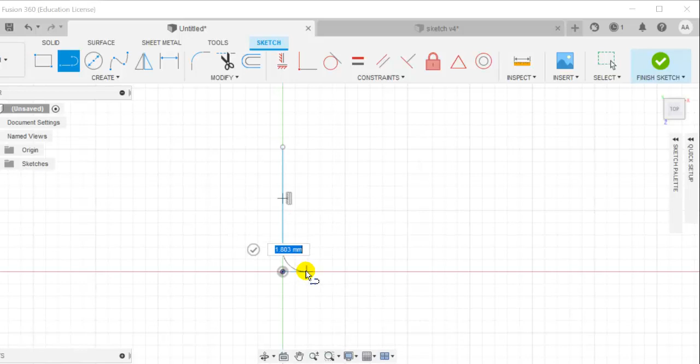We're going to quickly do this and put the dimensions later on. So I'm going to go to Fusion without dimensions, just kind of play around with it and continue to see where it takes me. I'm not going to put any dimensions yet, just make sure it looks very similar.

So you can see this line over here. When I finish this line, it's not horizontal. We can use constraints to make this horizontal, and we have certain constraints available, so we can probably make this perpendicular to this one, and then I have a horizontal line.

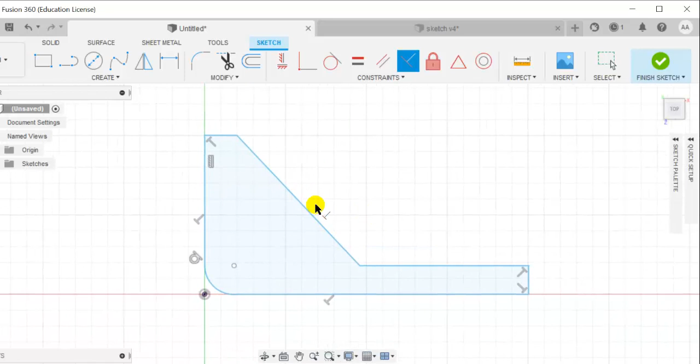I'm going to start putting my constraints, which are basically dimensions. What I see is that this is 6, this is 10, so this shouldn't take long. I'm just going to put, it's going to be 6, and basically this is 10.

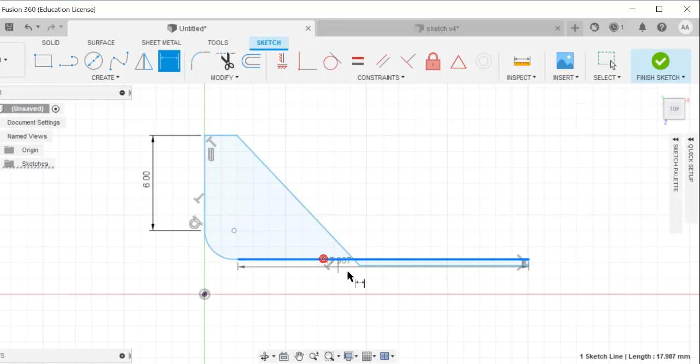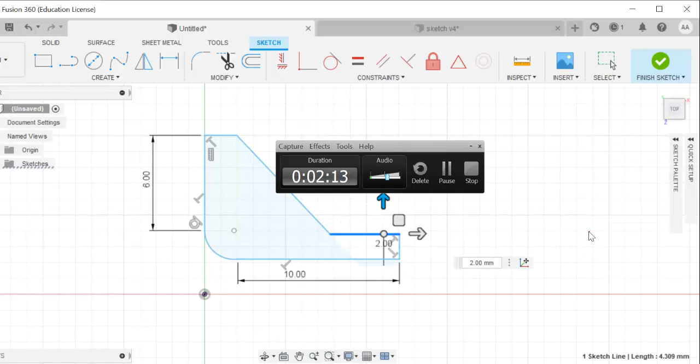And this line over here, so we have 10. Now just move this line over here. We can move it just a little bit so it looks a little better. Okay, and what else do we have?

We have that this is 5, so this one is 5. Make sure that this is 5. And then by construction we can get these.

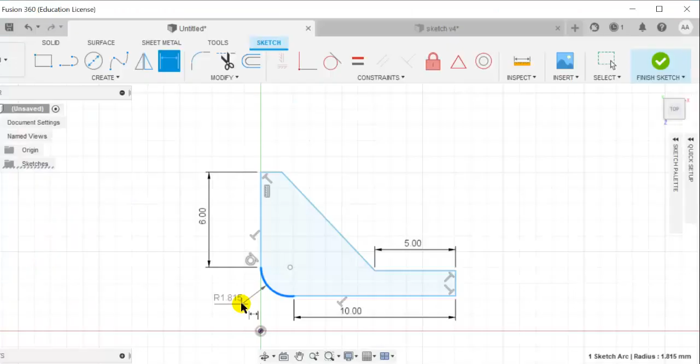So this is going to be R1. I see that this R1 is 1, just 1 millimeter. As you can see, some of the things are not quite okay yet, just because this is supposed to be 10, and this is going to be, as you can see, this bump.

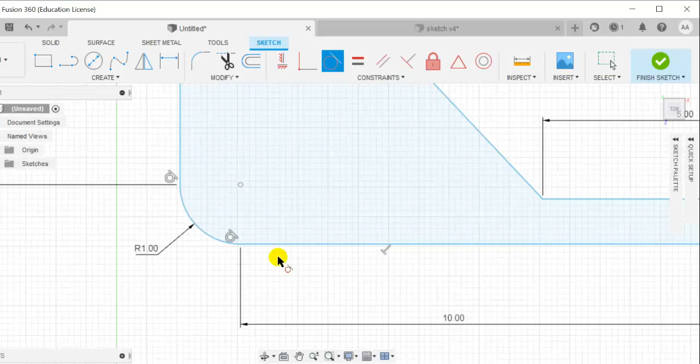So let's try to make it tangent. This has to be tangent to this one, and we'll see what we can do. Now this one is also 1, so we know that this is 1.

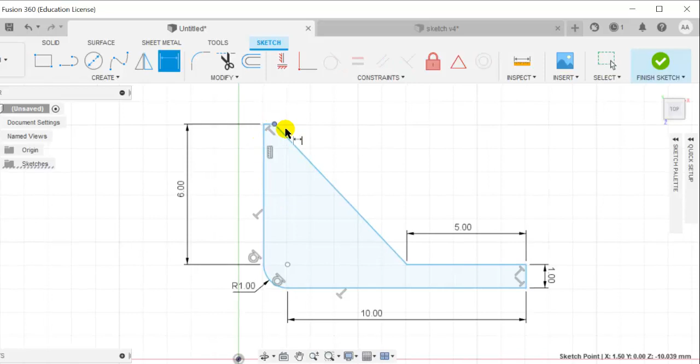There we go. And then by construction this one should already be done. Then this one is also 1. I'm going to make sure that this is 1 also, and just click here, and this should be 1.

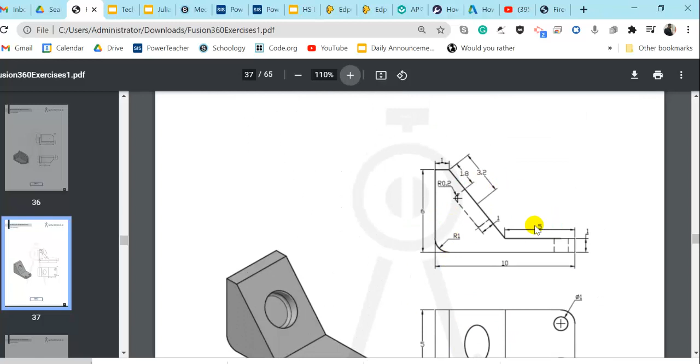So there we go. So we have our construction, and it looks like the radius, the center of this, is 3.2. We're going to do that in a minute and I'll show you how to do that hole, but we can have the rest of the constructions well made. These holes are going to be done later on.

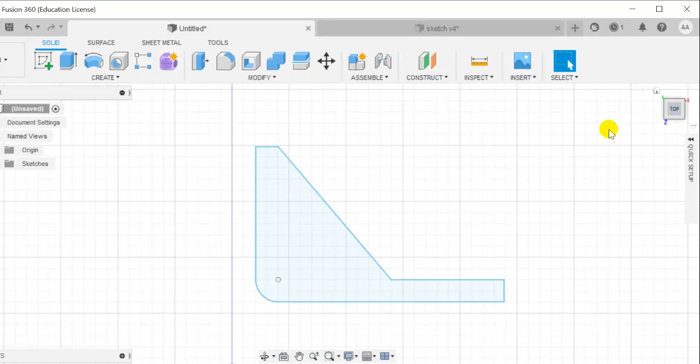So the first part is just extruding this. I'm going to click on finish sketch, and now it's a complete profile that I can extrude. I'm going to show you right over here, and this profile can be extruded.

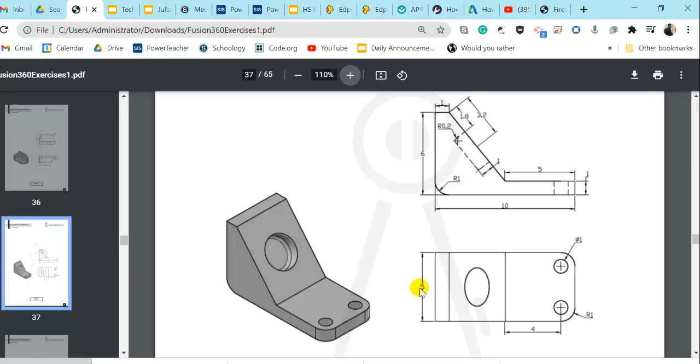I'm just going to click on it, then click on extrude, and see what is the size of this. It says that it's 5, so I'm going to just extrude it 5 millimeters.

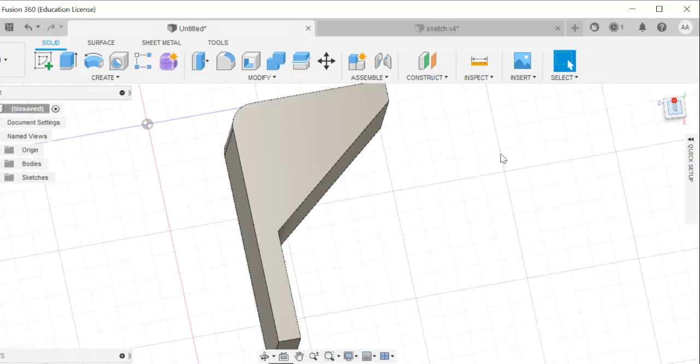Just press enter, and I see that the body is like on the ground, but it doesn't matter as long as I start playing with it. I can see that there it is, and I can see the shape that I need.

After we have completed our body, we need to make sure that the body has all its components and is completely solid. And now we can start creating our holes for this solid.

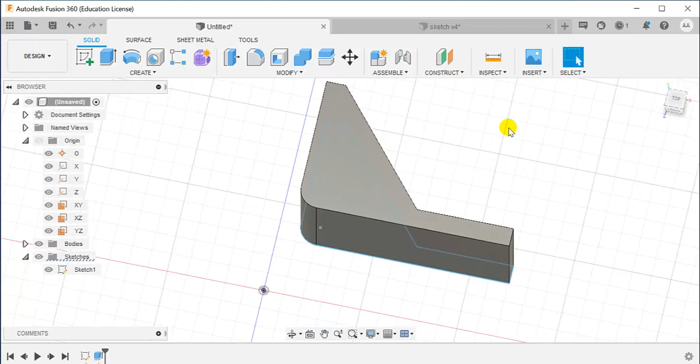Now the first thing we're going to do is change the perspective of this body. So you can see it's right on the top view, and maybe I want it on the right view or on the front view. It's a very simple task.

I can align any of the bodies to any of the surfaces that I have on my plane. So we're going to click on Modify, click on Align, and select what is the face that I need to combine or align with one of the planes that I have.

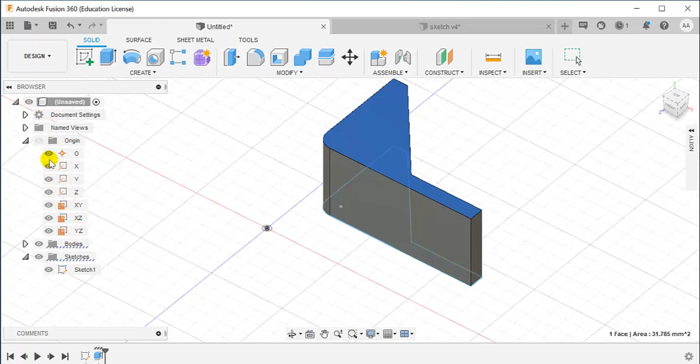So if I enable the origin, I can see all the planes on my workspace. Now I'm going to align it to this one, and now I see that the body has moved right on the front view.

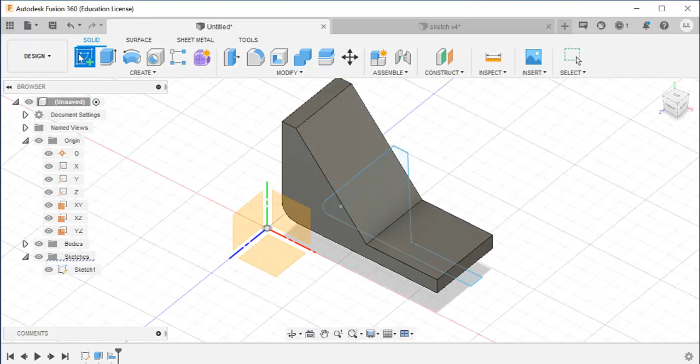Okay, now I'm going to press enter so the function is completed, and I need to draw a sketch right on this surface. So I'm just going to click on sketch, click on the surface, and now I can draw straight onto the surface.

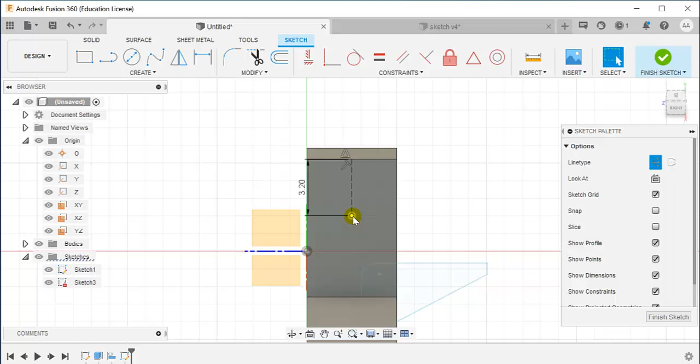I'm going to start with a line, and I'll make it a construction line just so I know it's right in the middle. As soon as I see the triangle, I'm going to click and drag down, and I know that it's 3.2, which will be the center of my circle.

And here I'm going to build a circle. As you can see, I have a circle. The center of the circle is at 3.2 centimeters, but I need to know where the edge of that circle is. So I need to know the radius or diameter of the circle, and it's very simple — it's actually 3.2 minus 1.8, and that's the radius. If I multiply by 2, I get the diameter.

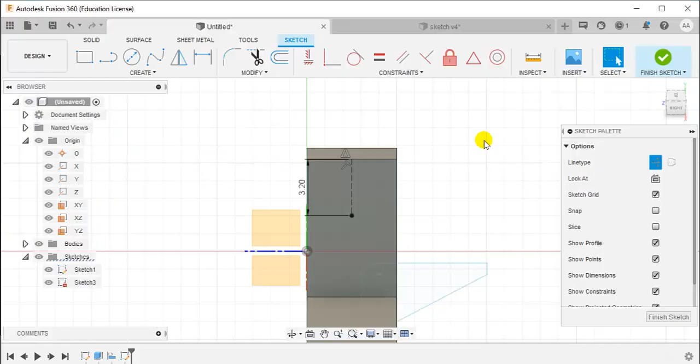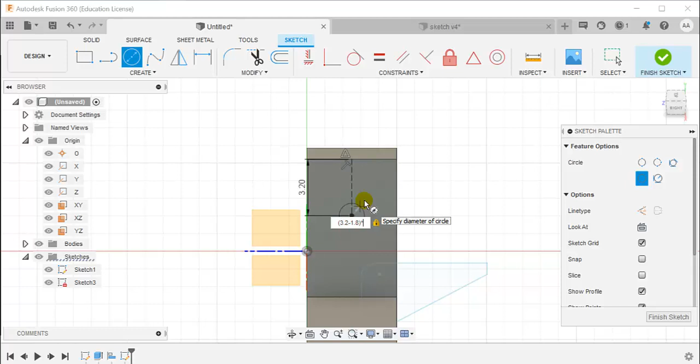Let's do that — we can do all those calculations right there in our program. I'm going to take away the construction line and say it's 3.2 minus 1.8, because that's what I was told, and multiply this by 2 to get the diameter. Click, and now I have the circle right in the middle.

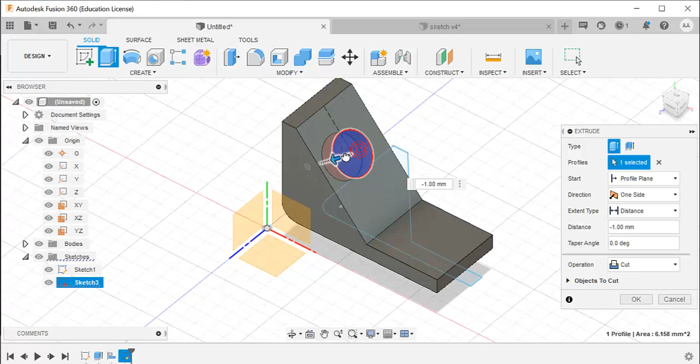After I have this circle, I'm going to click on Finish Sketch, and I need to extrude this, but this time I'm going to cut. I'm going to select the profile, click on Extrude, and instead of going up, I'm going to go down, but I can change the dimensions. It says it's 1 centimeter in, so there it is, minus 1, press enter.

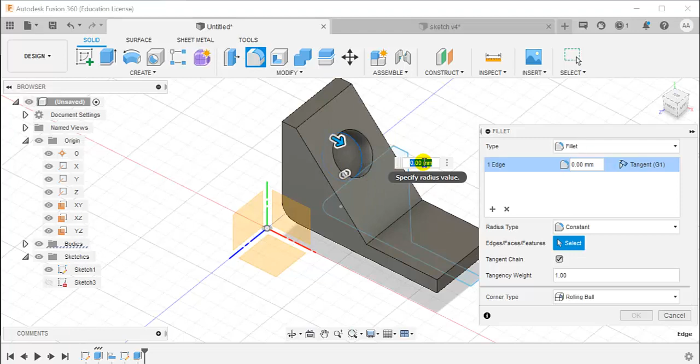But there's a slight fillet inside the cavity or the circle. So I'm going to click on this profile, on this line, and click on fillet, and select that it's 0.2. As easy as that. So we're done with the circle.

Now we have the circle, and let's go ahead and work with these small holes that we have at the bottom.

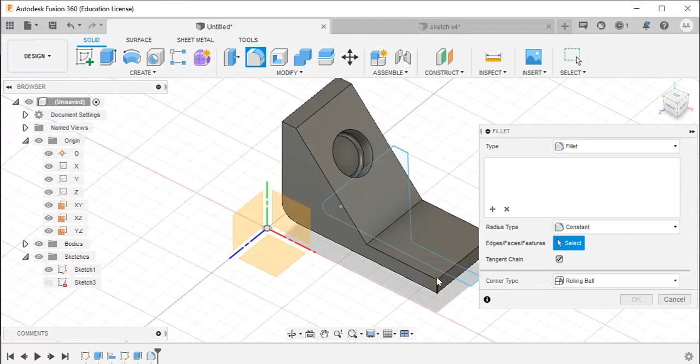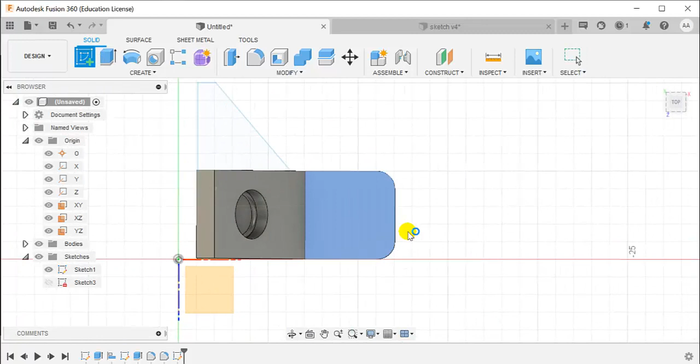And now I need to create the 2 holes right here. For that I'm going to create another sketch, but now on this surface. To create a sketch on this surface, I just need the circle. I'm going to create a circle which is 1 centimeter, and the same with this one. I'll go right over here, and it gives me a place point right with this radius, so I get the place center point that shows it's concentric with the curve I did before.

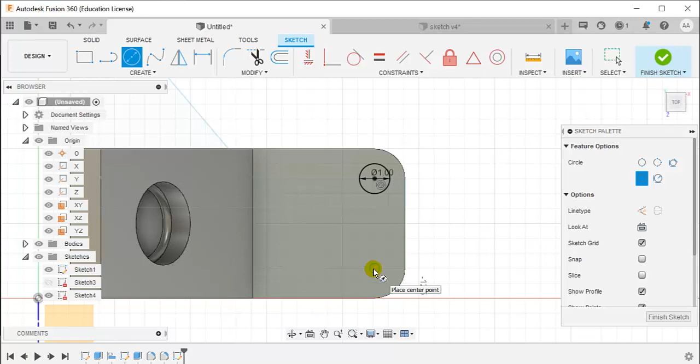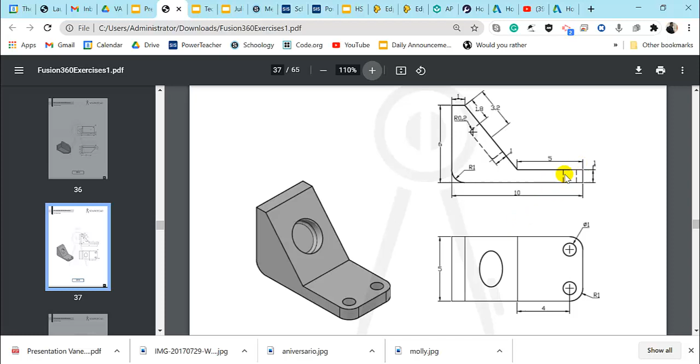I also have 1 millimeter, and then I'm going to finish the sketch, but this time after creating the sketch, I am going to make the holes. Now these holes look like they go all the way through, and I can see it right on the 2D design, where these dotted lines show that the holes go through the surface.

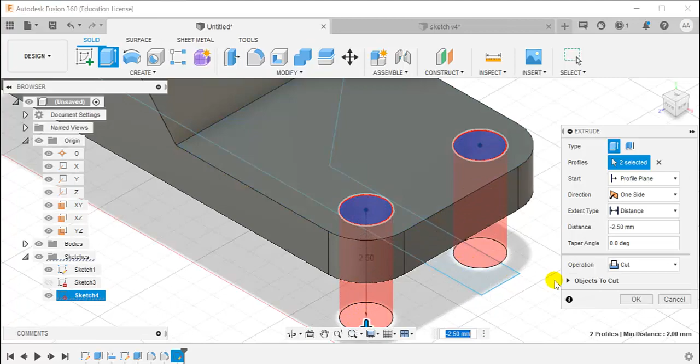So I'm going to select the two profiles — select one, and with the shift button I can select the two profiles, then click on Extrude, and I can just cut them right through. So here I have my design, my solid, which is very simple.

I can do it by doing a lot of sketches and different sketches on different surfaces. So I hope that this helps, and you guys can develop your own now.